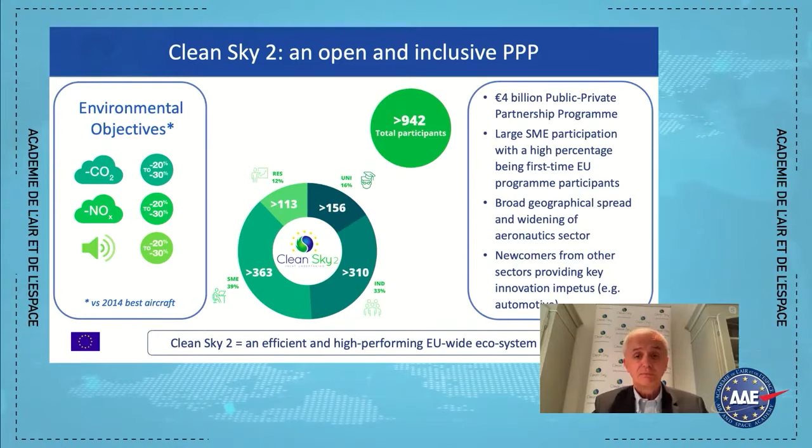I think altogether, this is showing that the aviation community in Europe is a very powerful body, a very powerful network, and that's what we are very proud of and would like to sustain. So on top of the technologies themselves, we are also proud of the network which we have been able to establish over the last decade. Next slide, please.

You see here the major demonstrators, 34 which we qualify as major demonstrators, and I obviously don't want to touch upon each of them. Maybe just a few highlights. On the aircraft configurations, we have the next generation tilt rotor demonstrator, and Racer, a new compound rotorcraft. We have hybrid laminar and natural laminar flow demonstrators.

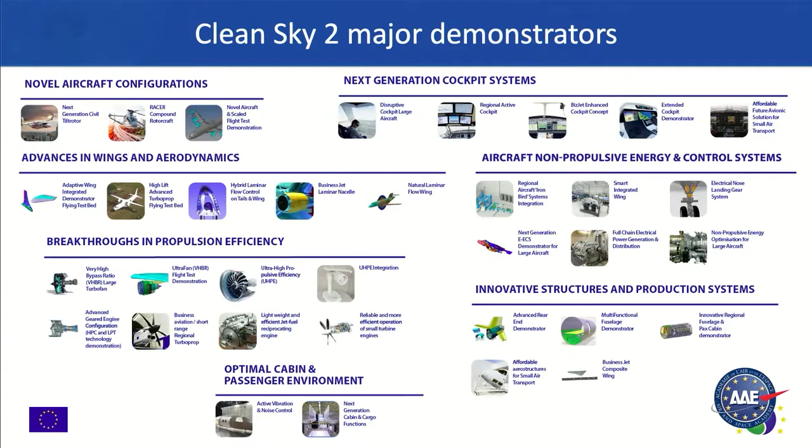On the propulsion side, we have ultra-high bypass ratio concepts, architectures for regional turboprops. On the system side, new environmental control systems demonstrators, also demonstration areas focusing on electrical power generation and distribution. And last but not least, the multifunctional fuselage demonstrator, an 8-meter long fuselage barrel, which targets a weight reduction of 1 ton overall and a cost reduction of $1 million per ship set.

We are roughly 2/3 through the program. We are entering now into a phase where those demonstrators are going to be in the foreground. Up to now, it was more basic technology, bringing them to the next stages, and now we are entering into the final demonstration phases over the next 3 years up to the end of the program. Next slide, please.

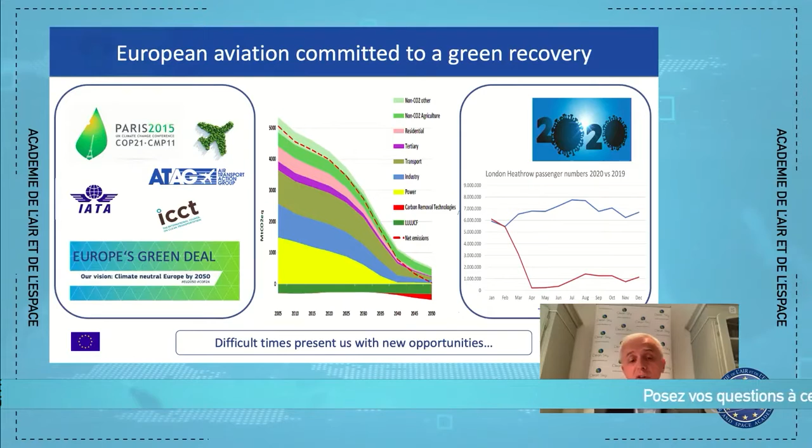At the beginning of this pandemic last year, we took immediate action for our participants, for our stakeholders. We deferred the deadline for Call 11, which was running at that time. We accelerated and released pre-financing and payments for our projects. And since then, we have been implementing various mitigation measures together with our partners from industry, research, universities, and SMEs. And we were able to continue delivering on our objectives. We think that with all those mitigation measures, we will be able to finish the program with the initially planned objectives.

Of course, we need to continue to monitor the situation and see how COVID may impact the coming weeks and months on top of what we have seen already. But we are reasonably comfortable that we can maintain and still deliver against the objectives which I've indicated to you at the beginning. Difficult times, but difficult times also present us with new opportunities. And I think this new opportunity is the European goal of climate neutrality by 2050. A huge challenge, but at the same time, and that's how we perceive it right now, a huge opportunity as well.

And we at Clean Sky are more determined than ever to build climate neutral aviation and to make climate neutral aviation a reality in support of the European Green Deal. Although, and this is a point, we have to clearly state that achieving the Clean Sky 2 objectives will definitely not be sufficient to achieve those new targets. So the challenge is quite clear. The question is now, what do we do? Can you please go to the next slide?

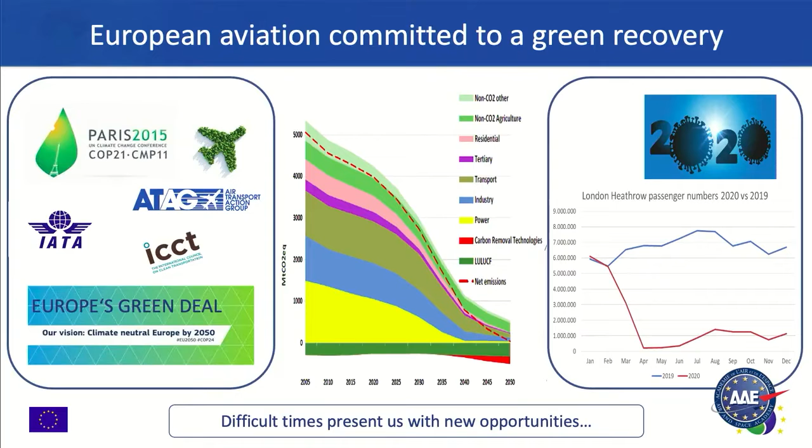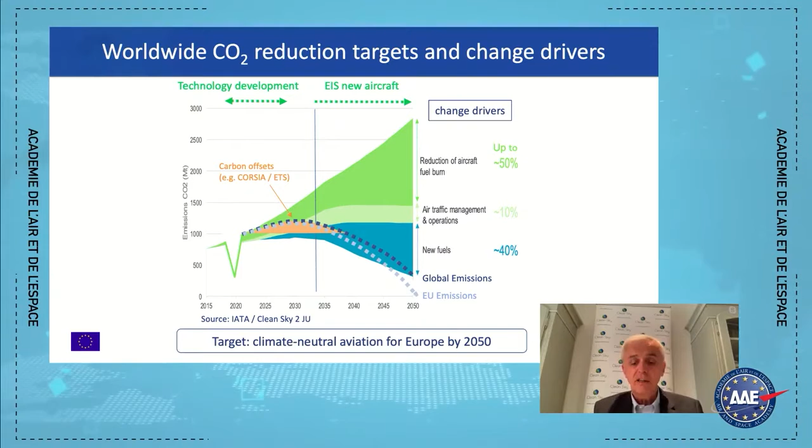You can see that highlighted there, that we consider the technology development needs to happen between now and end of this decade, with major demonstrators, being it ground or flight demonstrators, to be performed around 2027, 2028. And then the product development of those products need to be followed so that those products can then enter into service around 2035, maybe some of the smaller ones, maybe even a year or two before. Next slide, please.

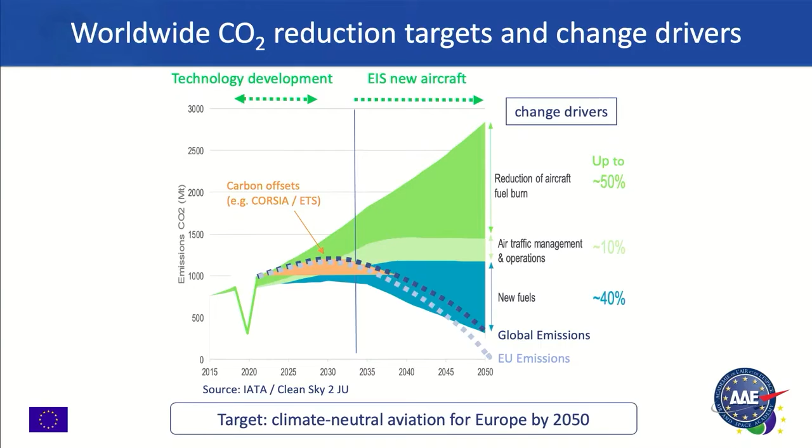And in this context, I do not believe that we can just extrapolate aircraft size and range requirements from the past. We will soon see CO2 emissions and fees per ton emitted far above what we know right now. When you look today at the European emission trading system, the price per ton emitted is roughly 40 euros right now, and has been increasing significantly over the last months.

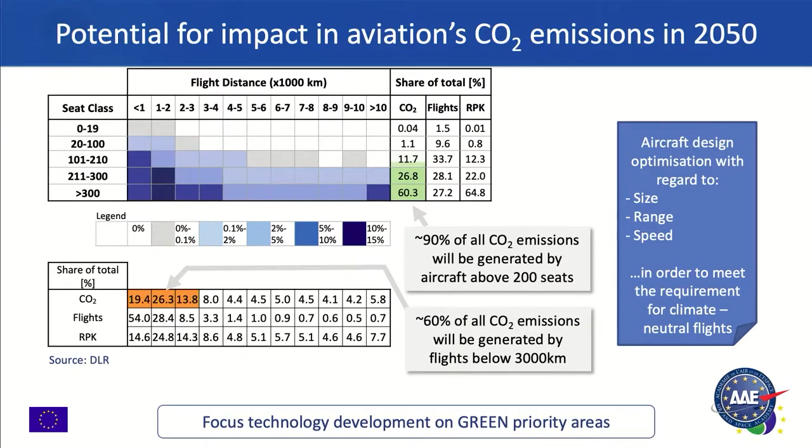And you may have read that Norway, for example, has just announced the cost of 200 euro per ton emitted CO2 by 2030. So today, ETS 40, Norway indicating 200 by 2030. If you do the simple math and assume for a second that this 200 euro would become reality in the future, and then you take the predicted growth in CO2 emission without any major impact, this would make a bill for the airline industry of 500 billion euros.

Impossible with annual profits of 30 billion euros. That would be far exceeding any benefit the airline industry is taking out of the ticket prices. So not sustainable at all.

So my conclusion here is we will likely see new aircraft appearing in the market with a seat capacity of, let's say, less than 150 seats and a range of probably only 2,000 kilometers, because only those concepts are technically doable within this time frame. And airline routes may need to be adapted to the capabilities of those climate-neutral aircraft. So, for example, a stopover for a 4,000-kilometer flight, only then the total distance can be covered by climate-neutral flying.

We have worked over the last year, probably 12 months, even 18 months, with various stakeholders of industry, research, universities, and very closely also with the European Commission. You see here that more than 30 private stakeholders from all around Europe, with very different backgrounds, and you see the logos on the slide here, developed the so-called Strategic Research and Innovation Agenda, which is a high-level technical description of the work which needs to be performed.

And those more than 30 private entities have also expressed their financial commitment to the proposed Clean Aviation Partnership, which was proposed by the European Commission. And you may have read that just recently, about 2 weeks ago, the European Commission formally proposed that new Clean Aviation Partnership to the Council and to the Parliament. They need to comment on those, and we are hoping an alignment can be reached around autumn, so that by late autumn of this year we can launch the new partnership for clean aviation. Next slide, please.

And here I would like to share with you a few items which are being considered as the core of the core, which should be part of that new Clean Aviation Partnership, and which should be its focus areas. And 3 areas have been identified, and you see those 3 here on the left-hand side. First, hybrid and full electric aircraft architectures. Second, disruptive technologies to enable hydrogen-powered aircraft. And last but not least, ultra-efficient aircraft architectures, for example, including new configurations, improved engines, and advanced aerodynamics and structures. So those 3 are the focus areas for the new European Partnership of Clean Aviation.

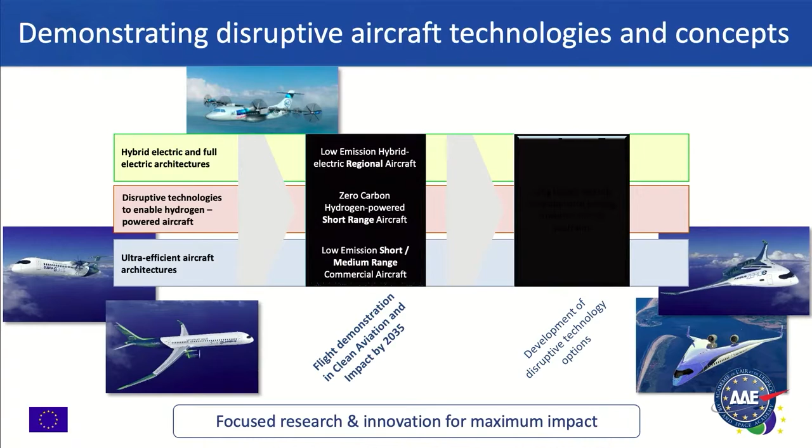Within the next slides, I'd like to focus a bit on that middle part, the hydrogen part, and provide you with some insights specifically on the hydrogen topic. We have worked in a study together with our colleagues from the Fuel Cell and Hydrogen Joint Undertaking, and also together with McKinsey and lots of stakeholders from the private side, lots of people who we have seen on the slide before. And so we have worked on the capability and the viability of hydrogen in aviation.

And you see here the different areas, comparing synthetic fuel with regard to impact on CO2, NOx, water vapor, and contrails, and the same for the hydrogen turbine, and the same for the hydrogen fuel cell. Without going into those details now, you will see that there is a significant positive impact of hydrogen in comparison to syn fuel. You see that syn fuel could reduce climate impact by 30 to 60% on the very right-hand side, while the hydrogen turbine can reduce the impact by 50 to 75%, and fuel cells even by 75 to 90%. So a significant impact in comparison to kerosene, which we obviously have in use today.

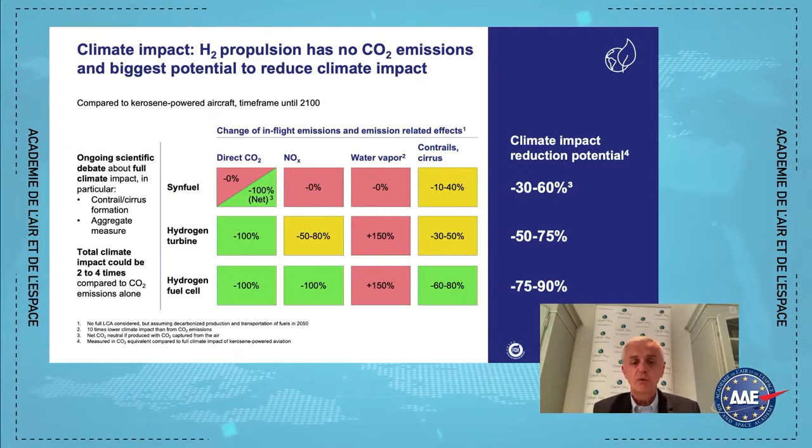There are lots of uncertainties around some of those topic matters. On CO2, it's pretty clear, quite direct, but on the other areas, NOx, water, and contrails, it's less obvious, and we are recommending research to be performed in these areas in order to get more assurance about those elements.

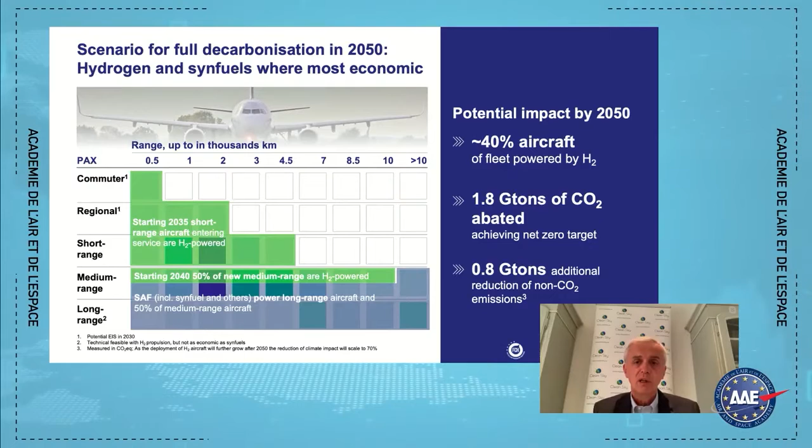The next slide, please. And there you see some scenario for what we call a full decarbonization by 2050. You see here that in the fields of commuter and regional aircraft with lower range requirements, we see that by 2030, 2035, quite a reasonable number of those aircraft can be replaced by hydrogen powered aircraft. For the medium range hydrogen aircraft, we think that's a bit later, around 2040.

The long range segment, and then you are moving into the blue part here, that will not see any hydrogen powered aircraft, potentially not before 2050. And those need to be then powered, obviously, by syn fuels or biofuels. In this scenario, and you see that on the right-hand side, we assume that a net zero target for aviation is possible, reducing the CO2 emissions by close to 2 gigatons versus the baseline with only efficiency improvements. 40% of the global fleet would be hydrogen powered.

And in addition to reducing the CO2 emissions, this scenario would also see an equivalent CO2 emission reduction by 0.8 gigatons of non-CO2 emissions. So that's why, for us, it's obvious that hydrogen can play a significant role in aviation industry decarbonization. But to get there, we need to invest. We need to invest in research and innovation, and we need to make those technologies affordable as well. Let's go to the next slide, please.

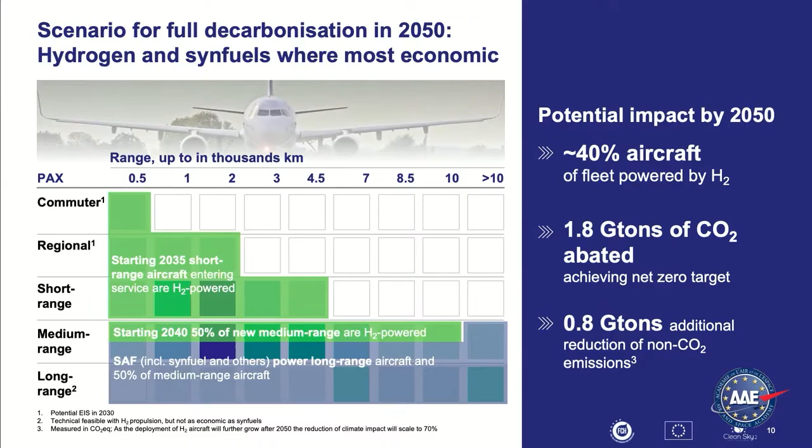And there you see here an aircraft design with 4 major technology improvement areas. You see the liquid storage for hydrogen on board of an aircraft. Currently, the LH2 tanks have an energy density of 6 kilowatt hours per kilogram. That needs to be doubled for commercial aircraft. The distribution of liquid hydrogen is totally unclear at aeronautics level, at aircraft level. That needs to be researched.

The fuel cell systems need to get to a level of 2 kilowatt per kilogram, absolute power rating of 10 megawatts. Also, that is not available right now. And lastly, the turbines are not available to burn hydrogen. Also, that needs to be researched. So quite ambitious technology developments which we foresee to happen.

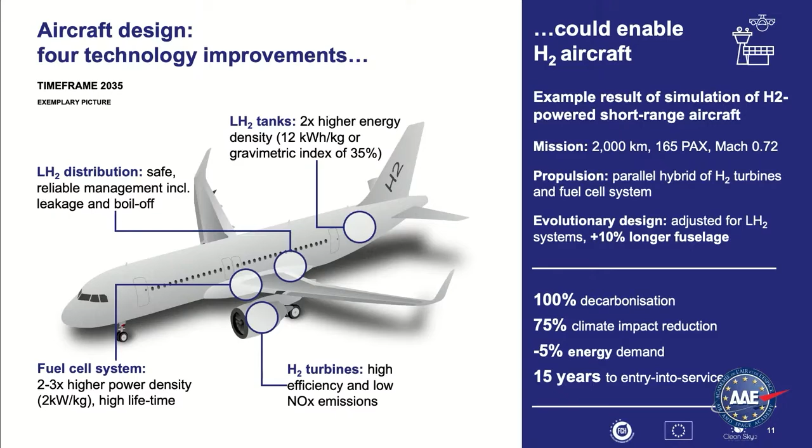But what we did based on that, we had some detailed design studies, and we were indicating what type of mission, what type of passenger aircraft could be viable. You see that here on the right-hand side, that we believe that an A320 type aircraft, tube and wing, as you can see it here, might be feasible with 165 PAX numbers, with a length of an A321 to accommodate specifically the LH2 tanks, as you can see here.

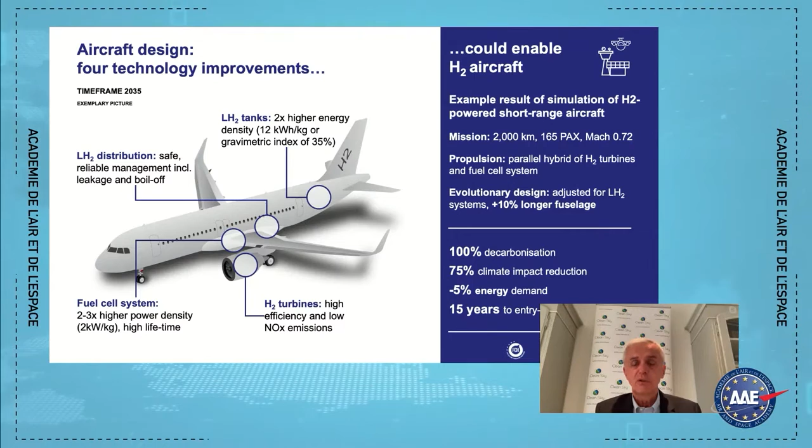And by that, we assume that this type of product could have an energy demand which is reduced by 5%, climate impact reduced by 75%, and no CO2 emission in flight. So that is something we foresee to happen potentially within the next 15 years. But again, before an entry into service around 2035, significant investments are required. The next slide, please.

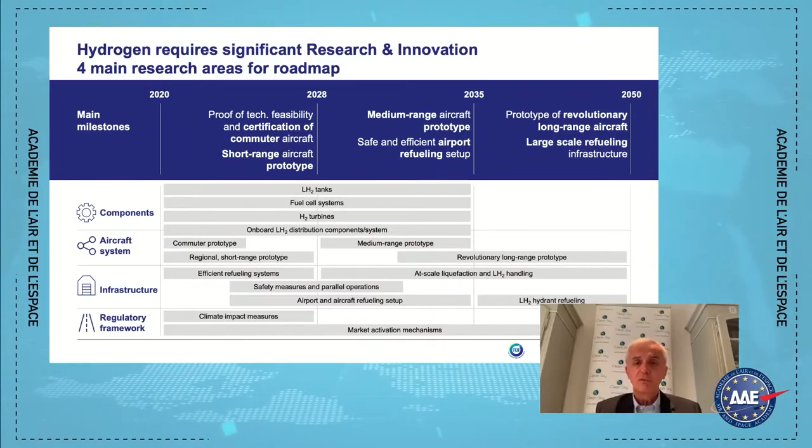And this is indicating a bit what we are foreseeing over the timeline. 3 major milestones: one around 2028, proof of technical feasibility, first certification rules for commuter aircraft being available, first prototype for short-range aircraft as a requirement for an entry into service around 2035. The second around 2035, then building on the previous designs, a medium-range aircraft prototype for an EIS around 2040 seems to be reasonable.

And then by 2050, the aim should be to explore how hydrogen could also play a role in the long-range segment. This will require a very different aircraft, most likely even blended wing-body aircraft configurations, which need to be explored, which need to be researched, where the technology is far, far, far away from maturity. So in order to achieve that net zero, these investments need to happen now.

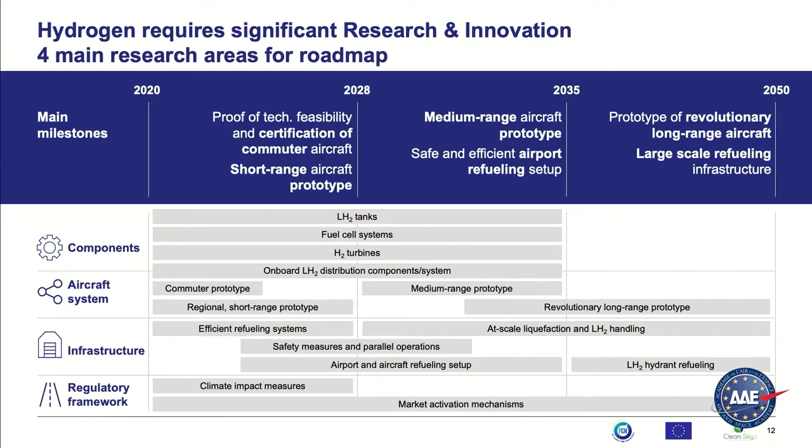And I think that's so important that we are putting those investments together and that we are sharing those investments at European level, because none of those topic matters can be achieved alone. And this is my final 2 slides now. Please go to the next one, where I would like to put your attention on the effort which we need to spend for research and innovation in the next decade.

And you see here that we have calculated an effort of roughly 12 billion euros, which we believe is necessary in order to make those technologies, first to identify those, to develop those, to mature those, and then to demonstrate those, as described just before. 12 billion euros. Fortunately, not just by Clean Aviation or Clean Sky alone.

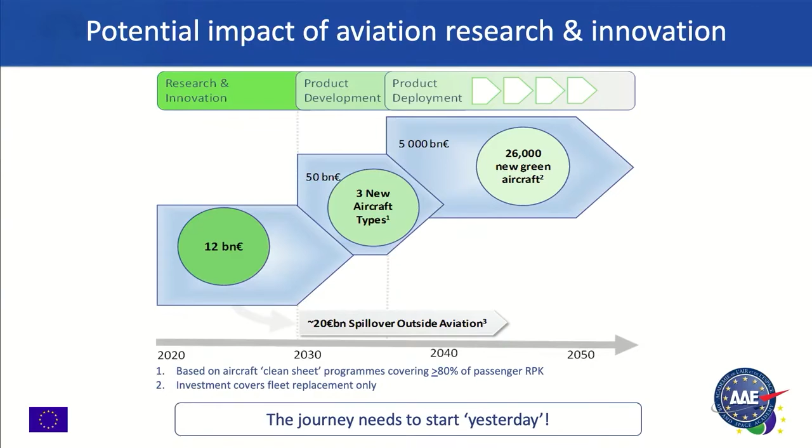These 12 billion is a sum of all the research effort in aviation, dedicated and focused on aviation topic matters all over Europe. So to those 12 billion, Clean Sky and Clean Aviation will contribute. To those 12 billion, we are expecting the private 100% self-invested money will contribute.

And we are hoping as well that we can coordinate well with the regional and the member state funding mechanisms in order to have a very aligned view, aligned technical roadmaps, but independent programs under the responsibility of the individual parties, but technically aligned in order to make those significant and quite revolutionary changes happen, in terms of research, by the end of this decade, and then in terms of development, the next step by 2035 and the following years.

And you see here that this 12 billion investment will trigger a 50 billion investment by the aircraft manufacturers and their supply chains, the engine, the systems, the structural providers. So they need to spend 50 billion in order to develop those aircraft based on the technology which has been developed before. And then finally, the airlines need to buy those products. And this will then conclude 5,000 billion of investment in order to buy all those aircraft.

I'd like to focus your attention on the fact that first, we need to significantly invest in research and innovation within this decade, between now and end of this decade. And secondly, that there is a significant return on investment. As you can see here, the 12 billion will trigger the 50, and the 50 will trigger the 5,000 billion. So huge investments also from the private side, not just on the research bubble, but definitely on the bubbles of the 50 and the 5,000 billion in the next decade.

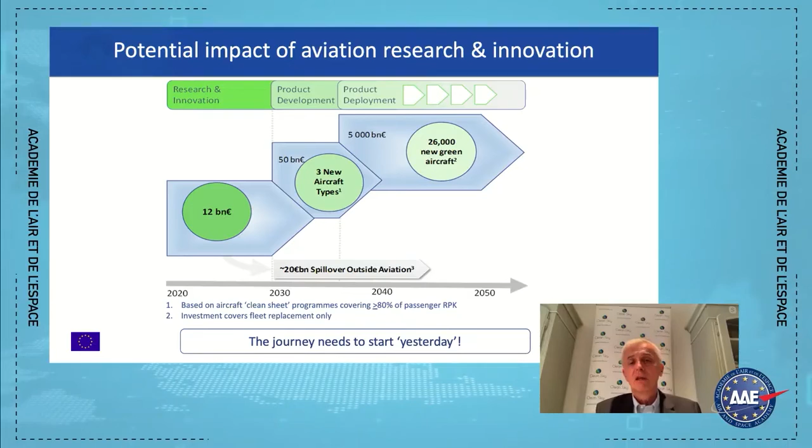Let me please conclude now. Next slide, please.

I wanted to share with you that we have used in Clean Sky, with all the stakeholders from industry, from SMEs, from the research organizations, from the universities, the time over the last decade to build up a very efficient and high-performing ecosystem in Europe. As I said, close to 1,000 entities, 950-something, around 5,000 scientists and engineers working on it. So really, really high-performing ecosystem on top of the technologies which we are delivering on a daily basis.

Second, I think what is very important, following the Green Deal announcement, Europe has formulated an extremely ambitious environmental target. And this is relevant not just for all other sectors, but also for aviation. And what I honestly believe, and that is shared as well by the community, is that we need a revolution in technology development, not only an evolution. I think we need to continue with evolutionary approaches, yes, but evolution will not bring us where we need to be. So we need to as well look at revolutionary approaches, and hydrogen, for example, would be one of those revolutionary approaches in order to get where we need to get.

What we need definitely is a wide participation of all stakeholders. I mentioned already the private side, but I think what is even as important is to also connect the public side, connect the member states, connect the regions, connect the European Commission and the European Union with all the instruments which are available in order to have really everybody aligned on that common vision and that common goal.